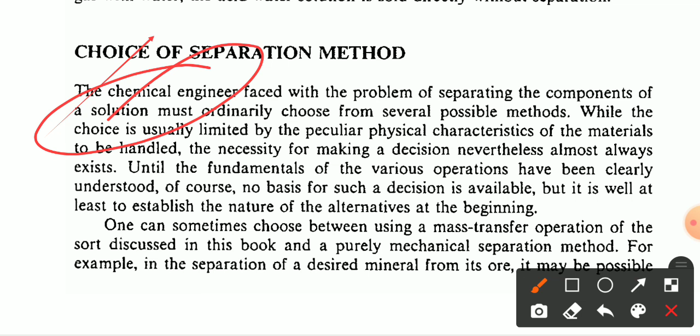While the choice is usually limited by the peculiar physical characteristics of the material to be handled and the necessity for making a decision, nevertheless, almost always alternatives exist. Until the fundamentals of the various operations have been clearly understood, of course, no basis for such a decision is available, but it is well at least to establish the nature of the alternatives at the beginning.

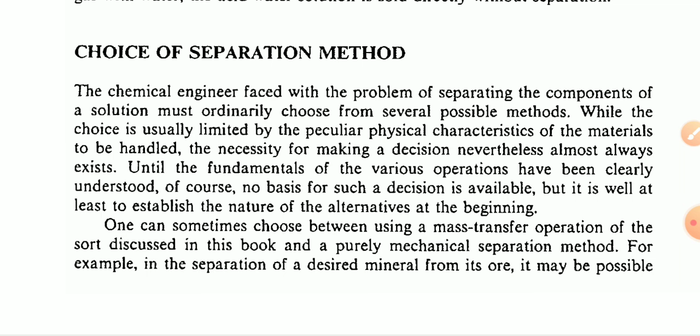One can sometimes choose between using a mass transfer operation of the sort discussed in this book and a purely mechanical separation method. For example, in the separation of a desired mineral from its ore, it may be possible to use either the mass transfer operation of leaching with a solvent or the purely mechanical method of flotation. Vegetable oils can be separated from the seeds in which they occur by expression or by leaching with a solvent.

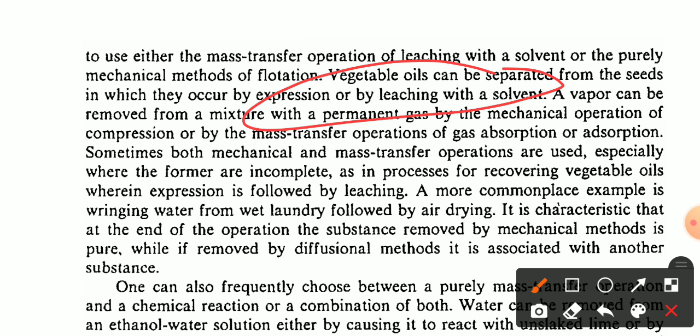Now, vegetable oils can be separated from the seeds in which they occur by expression or by leaching with a solvent. A vapor can be removed from a mixture with a permanent gas by the mechanical operation of compression or by the mass transfer operation of gas absorption or adsorption. Sometimes both mechanical and mass transfer operations are used, especially where the former are incomplete, as in a process for recovering vegetable oils when expression is followed by leaching.

Okay, a more commonplace example is wringing water from wet laundry followed by air drying. It is characteristic that at the end of the operation the substance removed by a mechanical method is a pure substance. Mechanical operations you have already studied. If removed by a diffusional method, it is associated with another substance.

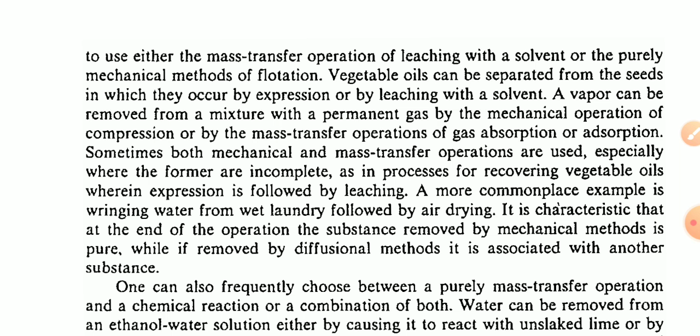One can also frequently choose between a purely mass transfer operation and a chemical reaction, or a combination of both. Water can be removed from an ethanol-water solution either by causing it to react with unslaked lime or by special methods of distillation.

For example, hydrogen sulfide can be separated from other gases either by absorption in a liquid solvent, with or without simultaneous chemical reaction, or by chemical reaction with ferric oxide.

So in the choice of separation method, hydrogen sulfide can be separated simultaneously with chemical reaction, or by a chemical reaction with ferric oxide. Chemical methods ordinarily destroy the substances removed, while mass transfer methods usually permit its eventual recovery in unaltered form without great difficulties.

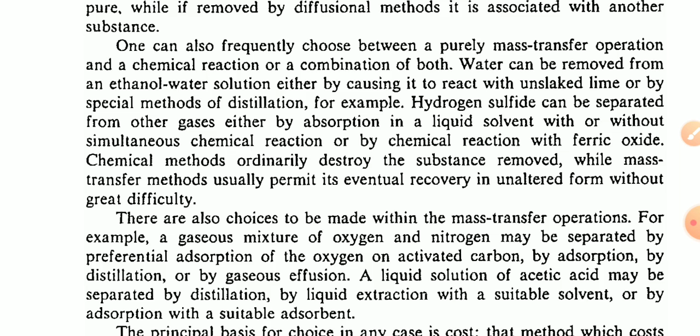Okay, simply as discussed in this part, there are also choices to be made within the mass transfer operation. For example, a gaseous mixture of oxygen and nitrogen may be separated by the preferential adsorption of the oxygen on activated carbon.

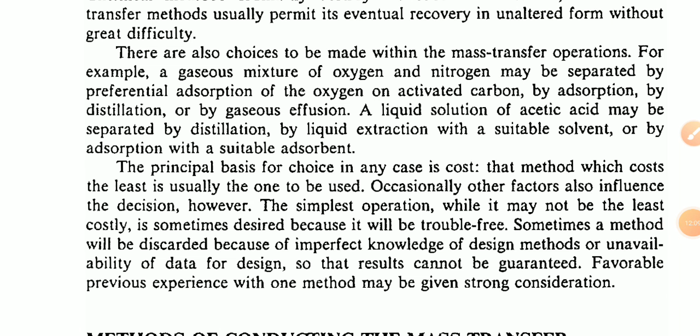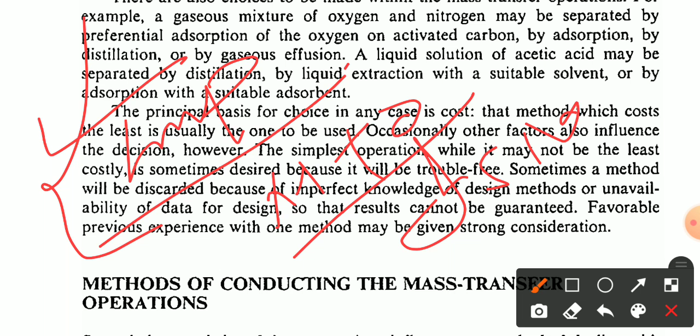Okay, and the last paragraph is this one. The important point in a mass transfer operation for the choice of separation method: the principal basis for choice in any case is cost. The method which costs the least is usually the one to be used. Occasionally other factors also influence the decision.

However, the simplest operation, while it may not be the least costly, is sometimes desired because it will be trouble free. Sometimes a method will be discarded because of imperfect knowledge of design methods or unavailability of data for design, so that results cannot be guaranteed. Favorable previous experience with one of the methods may be given strong consideration.

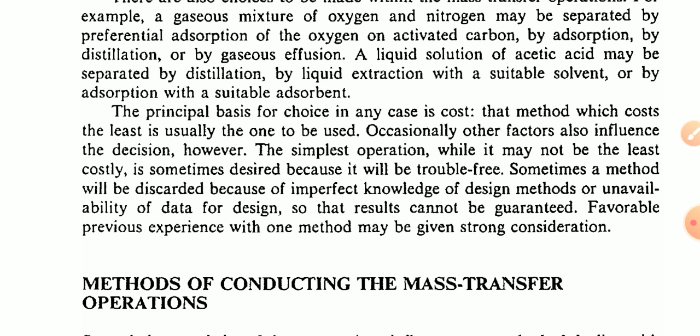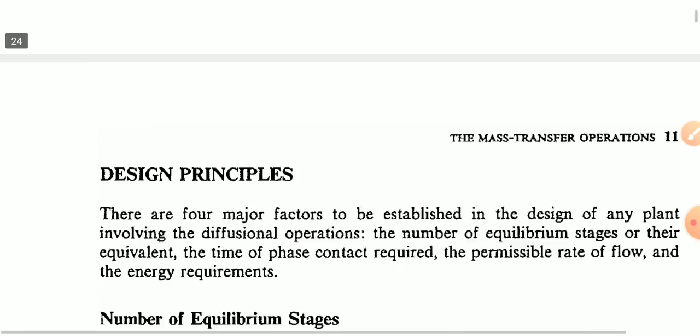Okay, this part is completely over. In the next lecture we will see methods of conducting the mass transfer operation and the principles. Okay, chapter 1 will be completely over.

In the previous lecture's revision part, direct and indirect contact. Read the following points. The operations depending upon the contact of two immiscible phases can be further subclassified into two types.

The direct operations produce the two phases from a single phase solution by addition or removal of heat; fractional distillation, crystallization, and one form of fractional extraction are of this type. The indirect operations involve addition of a foreign substance and include gas absorption and stripping, adsorption, drying, leaching, liquid extraction, and certain types of fractional crystallization.

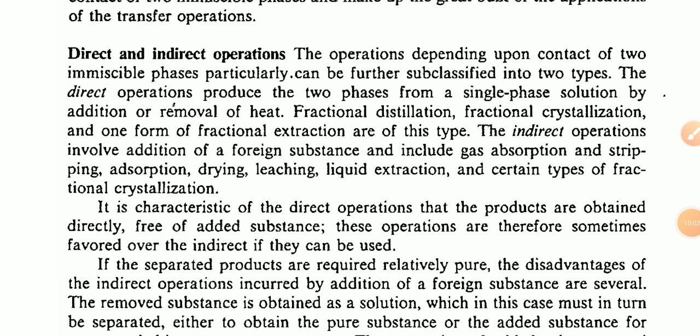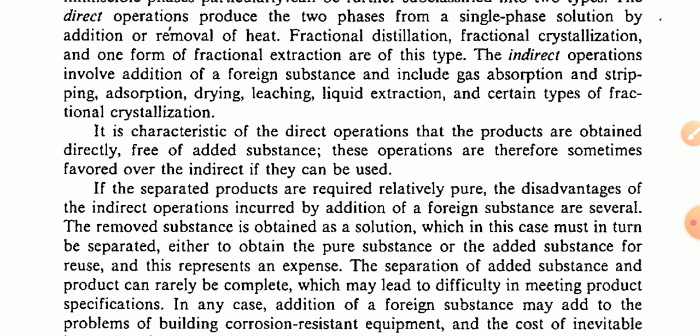It is characteristic of the direct operations that the products are obtained directly, free of added substances. These operations are therefore sometimes favored over the indirect if they can be used. If the separated products are required relatively pure, the disadvantages of the indirect operations incurred by the addition of foreign substances are several. The removed substance is obtained as a solution, which in this case must in turn be separated.

Okay, now the choice of separation method, which we have already seen.